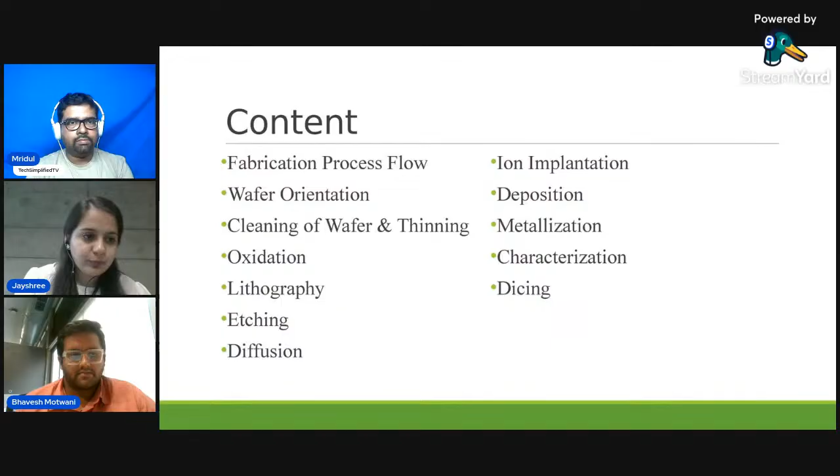So eventually, each of the devices has been stacked up with the help of different processes, individual steps, which we are going to cover in further slides. And then packaging is introduced, from dicing to die attach, then wire bonding, then after wire bonding, encapsulation to harden the device so that it is protected from the environment and doesn't get affected by the environment, stress and everything.

Then, once we are completely sure how the devices have been created, we go for testing, to check whether the whole completed device is good or not, and defect free. There are multiple reasons why we go for testing. And then the final step is the packaging. After packaging, the product is finished to get into the market.

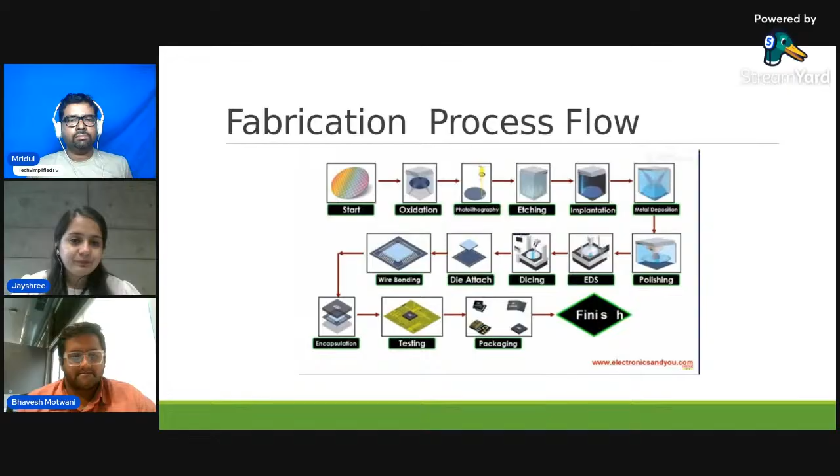So next is wafer orientation. I will hand it to Bhavesh. So generally, there are several different types of wafer orientation. 100 and 111 are the basic orientations that are in the market. They are mostly used. There is also 110. Then there are 200 and others.

Now, the reason for the names 100 and 111 is their crystallography. Crystallography plays a major role here, because someone from science would know that the arrangement of atoms is generally in a cubic structure: face centered, simple cubic, body centered. So there are different atomic structures, and that way the wafers are made.

And with the changing of the orientation, 111 is a mechanically very strong wafer. So 111 is generally used for MEMS devices and power electronics devices. 100 is used for better oxidation. If we want to make an IC, 100 can have a better oxidation. If we want to just do oxidation and make an IC, a MEMS device or an RF device, 110 is also a better option.

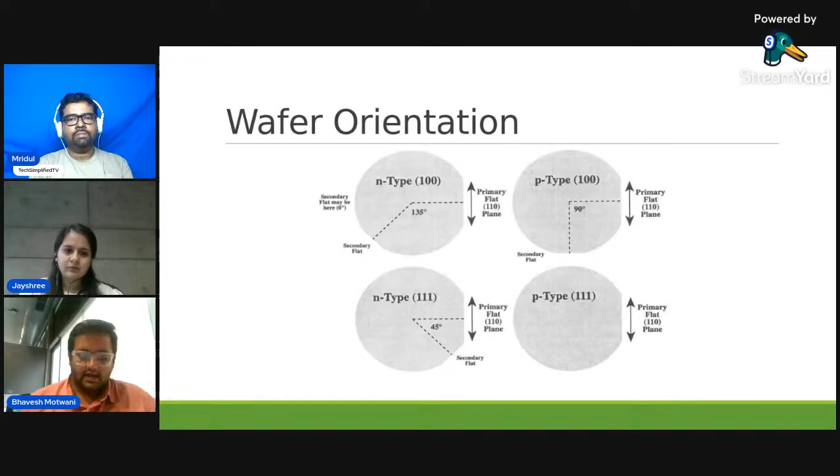So now we'll go through wafer cleaning and I'll hand it over to Jayshree. So basically, what is wafer cleaning and thinning? The term itself says how we are going to clean the wafer, and thinning means how the wafer size gets decreased. So firstly, we will go for the cleaning. There are multiple steps. Depending upon the industry, the requirements change.

So firstly, we will go for organic cleaning. What is organic cleaning? We are doing it for removal of residues like photoresist or oils, and contaminants from our body. Our body produces a lot of sodium. So how to remove it? So basically, we go for organic cleaning, then dry cleaning, and then inorganic cleaning.

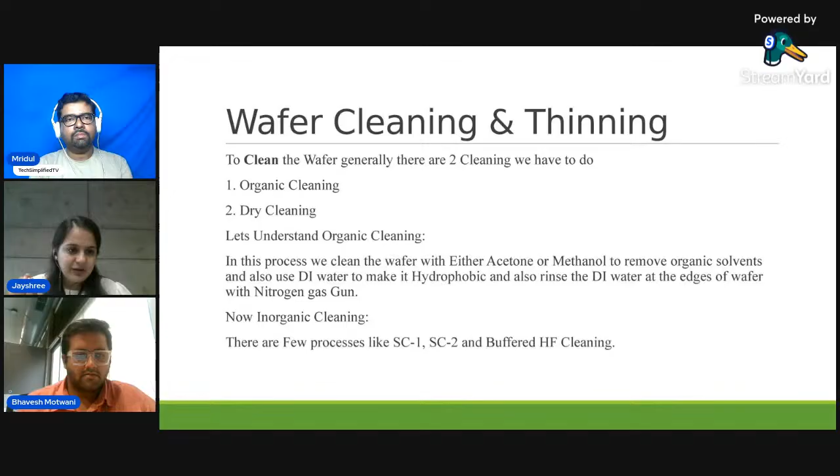The chemicals used for organic cleaning are acetone or methanol, to remove the solvents. In this image, consider the Si surface as a wafer, with multiple contaminants stuck over it. So how are we going to remove them? There are inorganic materials, organic materials, particles, and other contaminants spread over the wafer. So firstly, we go for the organic cleaning.

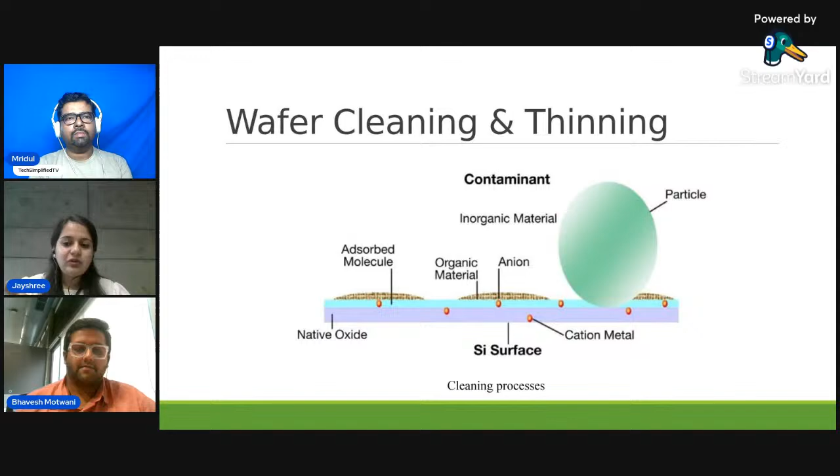Organic cleaning basically removes contaminants with the help of chemicals like acetone and methanol, and then with the DI water we are going to rinse off the wafer surface to make it hydrophobic. And then eventually in a later step we are going to use the N2 gun to blow off all the water spread over the wafer to make it hydrophobic basically.

And then inorganic cleaning. So basically what is inorganic cleaning? There are two cleanings, SC1 cleaning and SC2 cleaning. SC1 is basically ammonia and hydrogen peroxide with the DI water. So we are just going to remove the first layer with that, and then in SC2 we are going to use HCl, hydrochloric acid, and hydrogen peroxide. With that we are going to remove the second layer, and then the buffered HF.

So what is buffered HF? The purpose of buffered HF is to remove the native oxide layer from the wafer, to clean the wafer so that it's free of the oxide layer. And then H2SO4 and H2O2 is basically used as the piranha solution, and that is like 3 to 1.

So basically, that's the most important step, and no one should try it casually because it's a harmful chemical, sulfuric acid. So we have to make sure that we are only doing this process in the clean room. Other than this we are not going to do this. And while you're performing this chemical process, there should be someone nearby you, so that if, God forbid, something happens, there is someone to protect you or to communicate with each other.

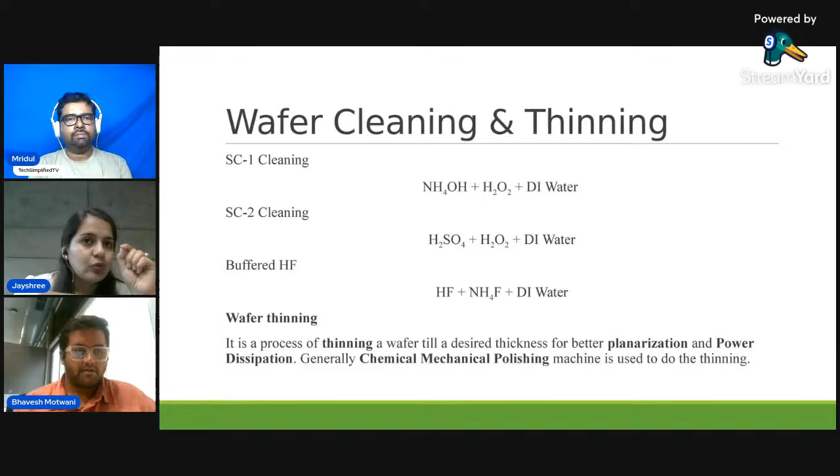So we will continue with the wafer thinning. Basically, what is wafer thinning and why are we going to do the wafer thinning process? Basically, for better planarization, power dissipation, and the last thing is to meet the thickness, I mean a constant height. Consider an example: if the company wants 2 mm, and with multiple layers the wafer gets to 3 mm, we are again going to do this thinning process.

We are going to remove the backside of the wafer, not the processed side. The backside of the wafer we are going to remove with the help of the chemical mechanical polishing process. As you can see, there is a slurry, because this process is going to heat up, and we are going to provide the slurry to make things cooler, and we are just going to remove the backside of the wafer.

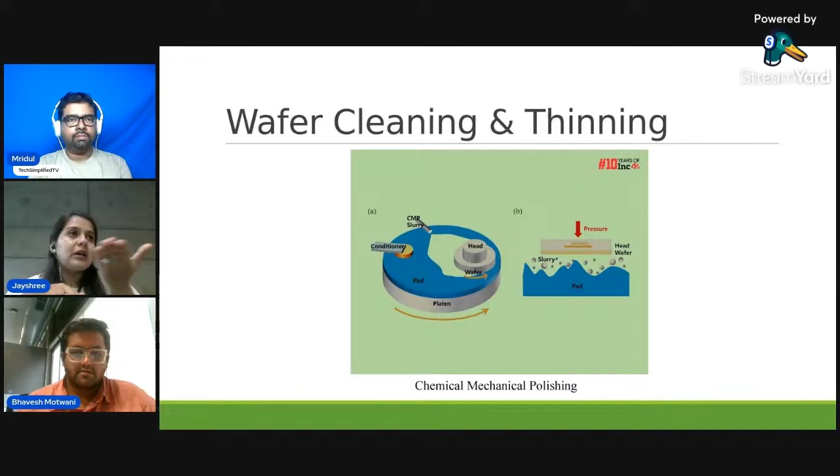Now I'll continue with the oxidation. Generally, oxidation is required for silicon wafers. We need an oxidation layer to act as an insulator. In my language, I would say it very roughly, as a rough idea: silicon is like a baby.

The reason I'm saying it is like a baby is because even if you breathe or exhale near the silicon, within a second it would take the contamination and become a contaminated wafer. So we need oxidation as an insulation and also as a passivation layer to protect it. It works as a gate dielectric for the MOSFET and different transistors if we want to fabricate them. As I said, the passivation layer.

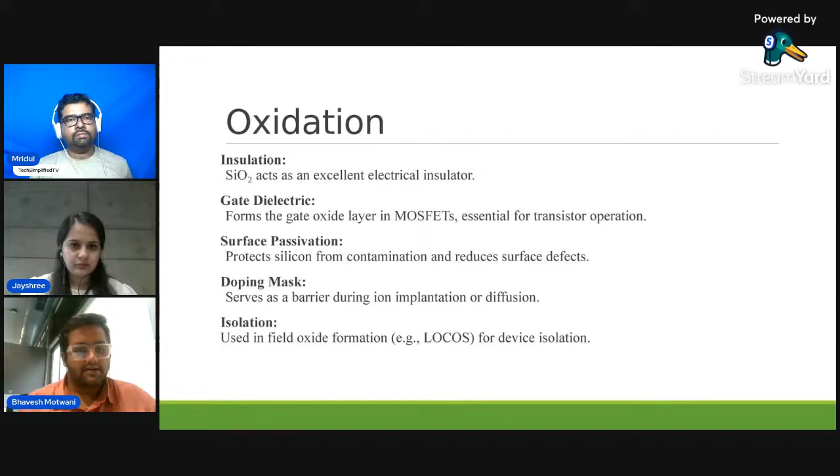We need proper doping, because doping is a part of the fabrication. It is also used as isolation for LOCOS. LOCOS is generally not used much now, but it is also a part of it in the industry. Now there are generally two types of oxidation: dry oxidation and wet oxidation. To give a general idea, dry oxidation is one of the purest forms of oxidation layer to be formed on silicon.

Its atoms are bonded like this. If we have bonding like this, there could be no point defects. There is generally no space like a grain boundary left, so no sort of contamination would happen in dry oxidation.

Whereas wet oxidation is very porous. During wet oxidation, the bonds are generally like this, so you can see the space between my hands. Within that space, a different molecule or atom might come in and make an interstitial defect, and may cause a problem in the SiO2 layer.

So generally, if we want to do an oxidation during research, we would do just a dry oxidation. But if we want to run an industry, generally in the industry they will first do the dry oxidation, then they will do wet oxidation, and again they will do dry oxidation, because it will cover the layer and make a proper formation for the porous layer, since, as I said, wet oxidation gives a porous layer.

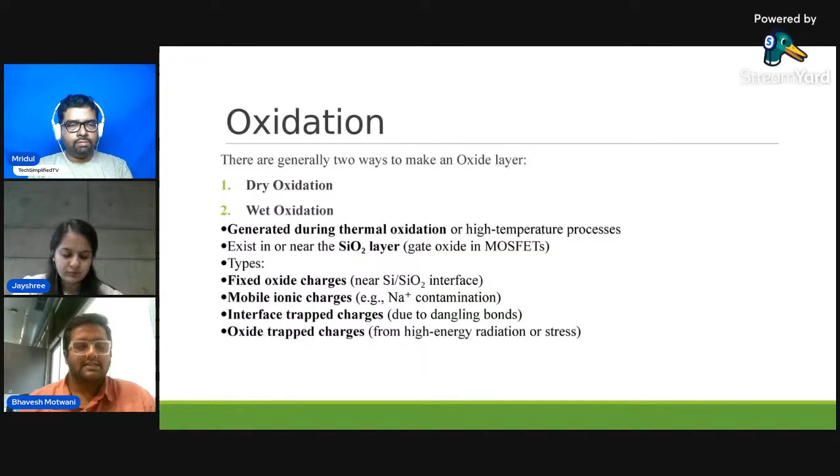Basically, for doing an oxidation, we need to go up to 1200 degrees Celsius. There is a thermal furnace, a proper furnace, for that. During thermal oxidation there are a few charges that come in, fixed oxide charges and mobile ionic charges. These charges form a contamination if we don't do the oxidation properly, so they can cause problems for IC fabrication.

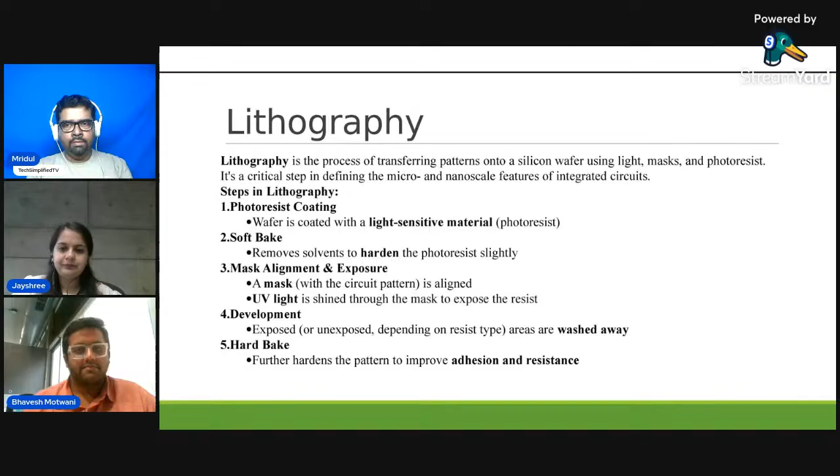As I said, there are two types of photoresist: negative resist and positive resist. Generally the mask is made up of chromium material, though some companies also use stainless steel, but it depends.

Now the importance: as I said, the mask determines the feature size, because I have to make different lithography layers repeatedly. For those working in the VLSI domain, while using Cadence Virtuoso or similar tools, joining those lines to complete DRC and LVS, DRC uses metal layers and polysilicon layers.

So we have to do different types of multiple metal layers, and for that we have to use lithography. We have to continuously perform lithography with multiple layers to make a proper IC. If we have to fabricate an IC, we have to do lithography multiple times. We've heard of advanced nodes like 2 nanometer, 3 nanometer, 4 nanometer - this is all because of lithography. We cannot go through advanced nodes without lithography.

Everyone knows ASML. If there were no ASML in India or in the world, I would surely say the semiconductor industry wouldn't be this much possible till now.

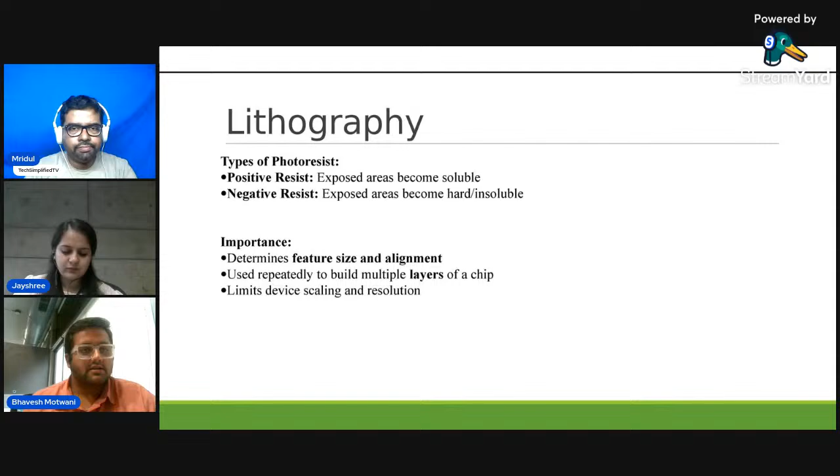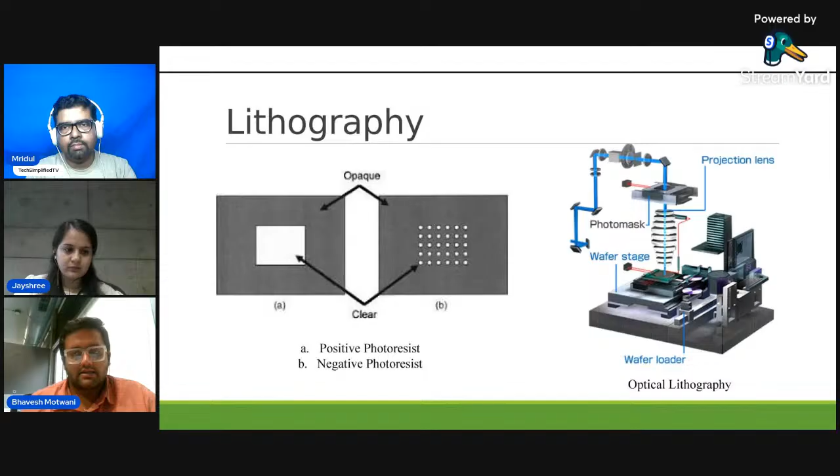As I explained, there's positive photoresist and negative photoresist, and there's also optical lithography. Optical lithography uses optical lenses to form some sort of pattern on the wafer. Now we'll come to this, which is also a proper process.

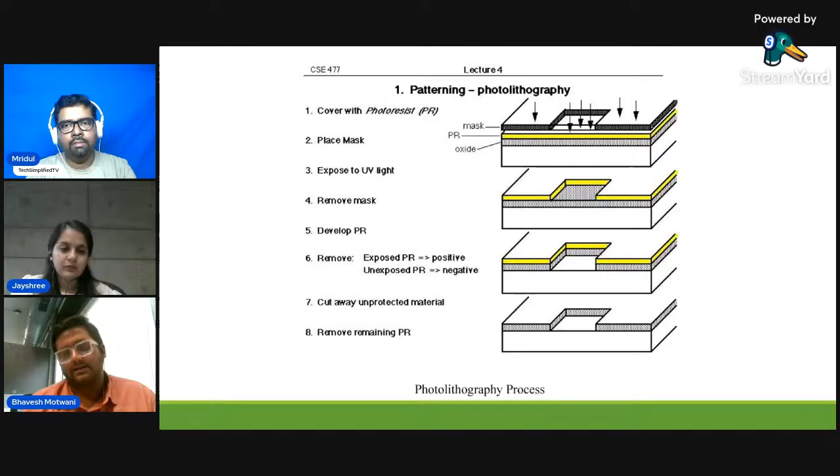We have to cover with photoresist, place a mask, expose it to UV light with the optical lithography machine, then run it through the developer machine. Then we expose with the positive or unexposed with the negative mask resist, then cut away the unprotected material, and what remains is a proper layer - whether metal or polysilicon, whichever we want.

Now we'll come to the etching. I'll hand it over to Jayshree.

So, as we got to know what lithography is - in lithography we are creating steps over the wafer to create a structure. So what is etching doing? The term itself means to remove the selected materials. To create the patterns, there are two types of etching process: wet etching and dry etching. Depending on the condition required, we choose one.

Basically, the reason we perform the etching process is to create connections. In simple terms, if we are going to connect power into different connections, like from the bottom layer to the upper layer, everything gets interconnected. We are basically creating gates and vias in the interconnects, and moreover.

So the flow is: firstly we remove the pattern defined by the photoresist, which has been developed over the lithography step. Then the etchant removes the exposed materials, while the remaining photoresist protects the unexposed area.

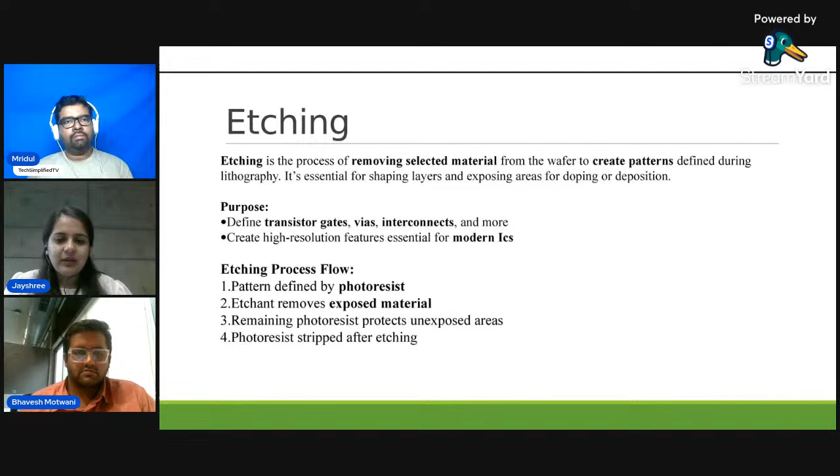And then later the photoresist strips off as it's being etched out of the wafer. So this is the whole etching process. Now I will go with what is wet etching and dry etching. There are two etching processes.

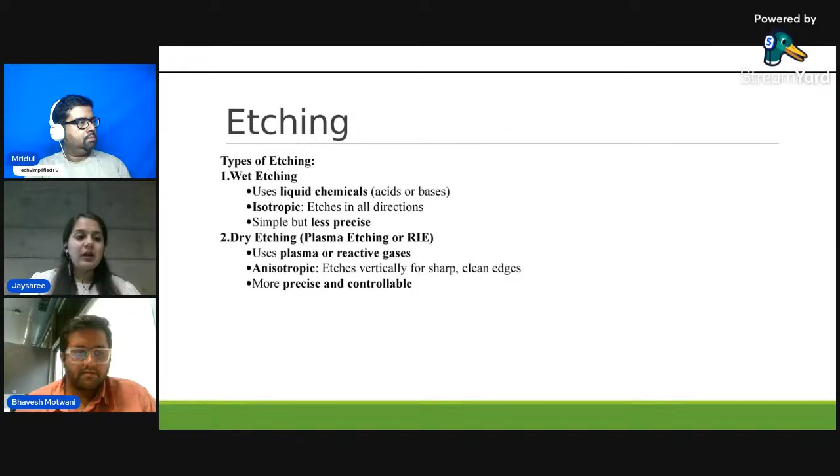This is done with different types of processes, like RIE (reactive ion etching), ion beam etching, deep RIE. Wet etching is also done with multiple steps.

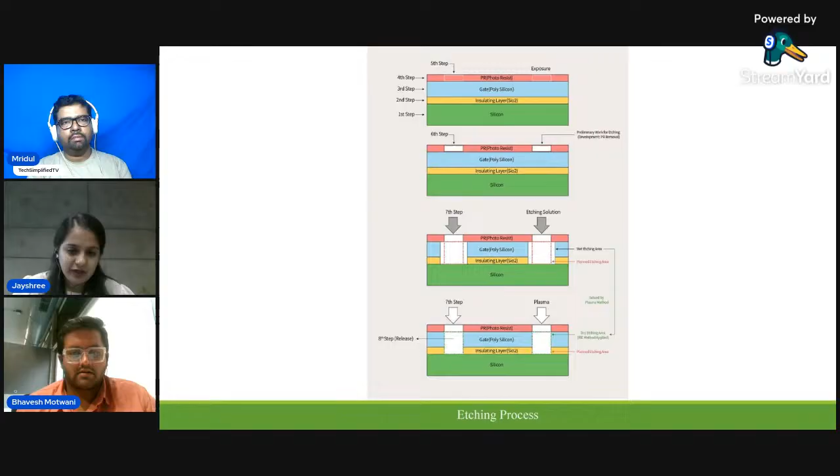We basically choose based on the selectivity to the mediums, from high to low, depending on the requirement and other multiple parameters.

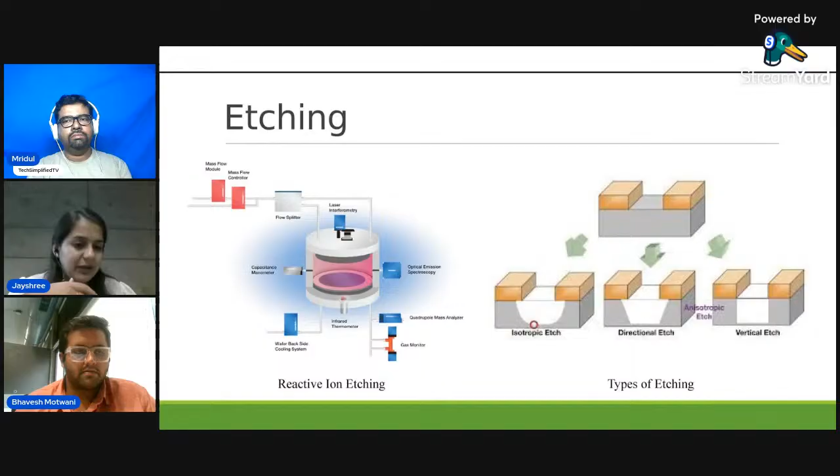Now I'll continue with diffusion, explaining it in a very basic way. Diffusion is putting something in an area, and it spreads out - that's the basic phenomenon. Diffusion is the process of introducing dopant atoms into the silicon wafer by thermal activation. We need thermal activation because with the annealing part, it becomes much easier to do the diffusion.

In the process flow, we have some sort of solid, gas, or liquid that gets diffused inside based on how we need it. As I showed with the oxidation furnace or thermal furnace in the oxidation part, we can use the same furnace if we want - we just need to change the bubbler. In the bubbler we add the material we want. The material can be n-type or p-type depending on our requirement - these can be boron, phosphorus, arsenic, bismuth, based on what we need to do.

Now high temperature annealing - after diffusion, let me explain. First we diffuse it, and if we diffuse the atoms, we need to spread them and make it work. To diffuse it, we diffuse those atoms in the drain and source, forming a proper tub-like shape, and those atoms would be set there in n-type or p-type, and we spread it out with annealing.

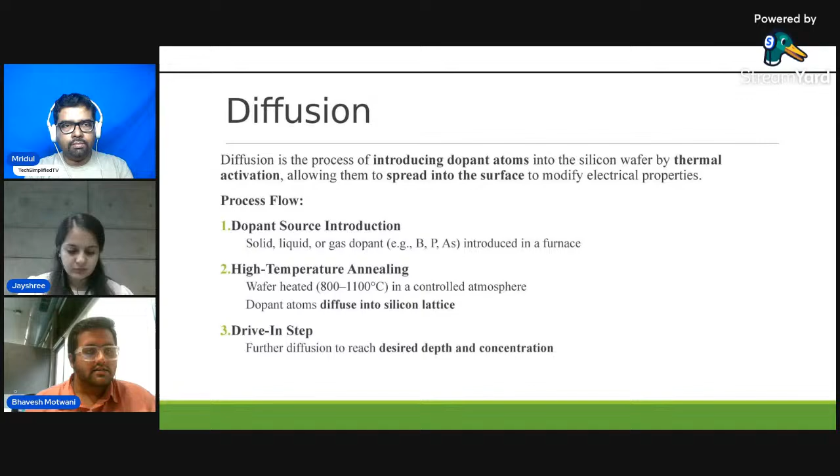If source has more and drain has less dopant, there could be a difference in VTH. So depending on the concentration, VTH can also change.

Now diffusion: as I said, for P type and N type, we need to dope the source, drain and base regions. Key parameters are time and temperature. More the temperature, more the diffusion; more the time, more the diffusion depth.

For diffusion we need to understand Fick's laws. There are two Fick's laws, one for the diffusion of the atoms and the second for the spreading out of the diffused atoms. There is also a continuity law, which is almost the same for how the atoms diffuse. We'll surely make a next webinar to understand Fick's laws in a deep manner.

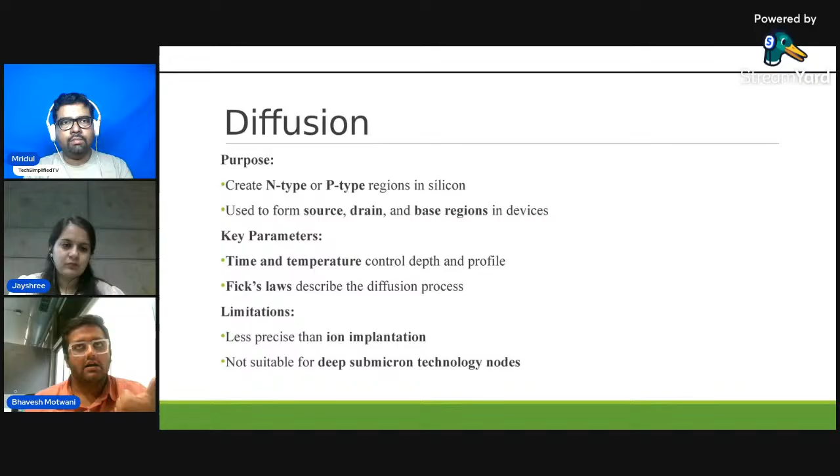Now if we have diffusion, there is also a similar part, ion implantation. We can diffuse atoms in two ways: diffusion and ion implantation. Ion implantation is almost similar to this, but it is more precise. It is used in more deep submicron technology, and it is very precise with more control than diffusion.

And then ion implantation. As I said, diffusion and ion implantation are similar for doping, almost similar, but they have a different technique of doping. Now, ion implantation, we need ion sources.

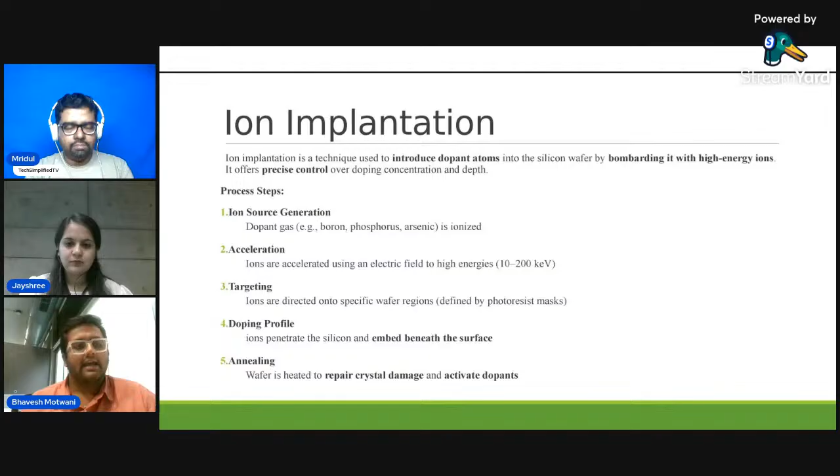As I said, it is expensive and can damage the wafer, but it is better for submicrons, and it is a guaranteed better technology than diffusion, very controlled if used precisely. Same as diffusion, we need to do it on source, drain, and base layer. So ion implantation has some issues, but it is very amazing, very beneficial for use.

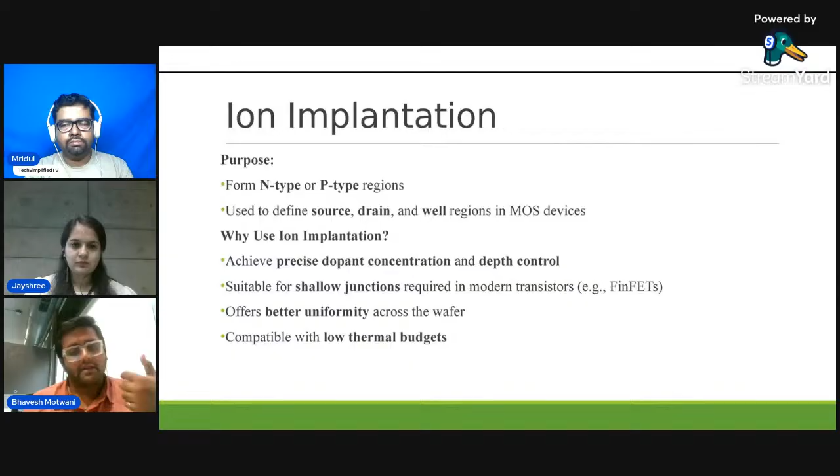As I said, it achieves precise dopant concentration, we can have precise depth control and proper control over it. It makes trenches like junctions, offers better uniformity, and is compatible with lower thermal budget.

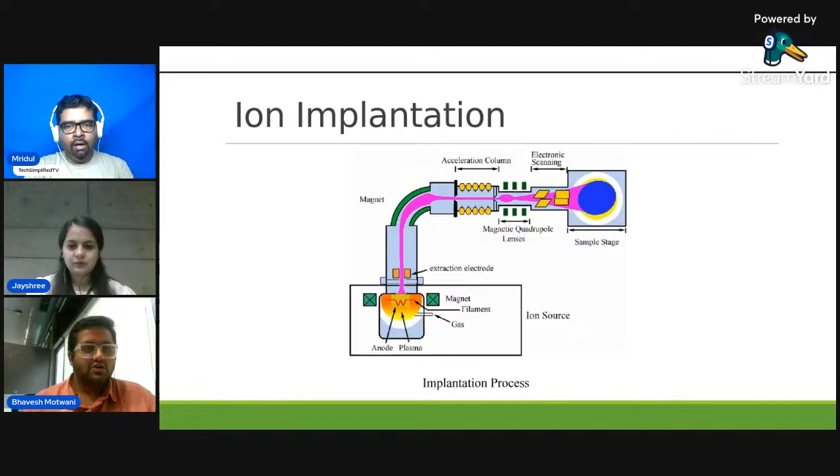It would make a trench and depth, and then we would anneal it at 800 to 1100 degrees Celsius to make proper doping inside it. And then we come to deposition. Now deposition will be explained by Jayshree.

So basically, what is deposition? Deposition is like depositing something. Depending upon what is depositing, we are creating devices, multiple devices adding upon the layers. Basically, deposition is a process of adding multiple layers, thinning the layers of metals, insulators, semiconductors, depending upon the wafer of silicon and requirements. So, what is deposition? There are two types of deposition.

In fabrication, we use aluminum for interconnects, copper for damascene process, and titanium tungsten for barrier layers. Different types of depositions have been made, and basically what are the key factors, what we are supposed to keep in mind while depositing metals, insulators or semiconductors, like film uniformity.

Like if this is the wafer, only certain materials are being deposited here and the rest is not being deposited, and it's idle. So yes, this wafer wouldn't be used further. We are supposed to make sure that the whole wafer is being deposited and exposed over the deposition layer.

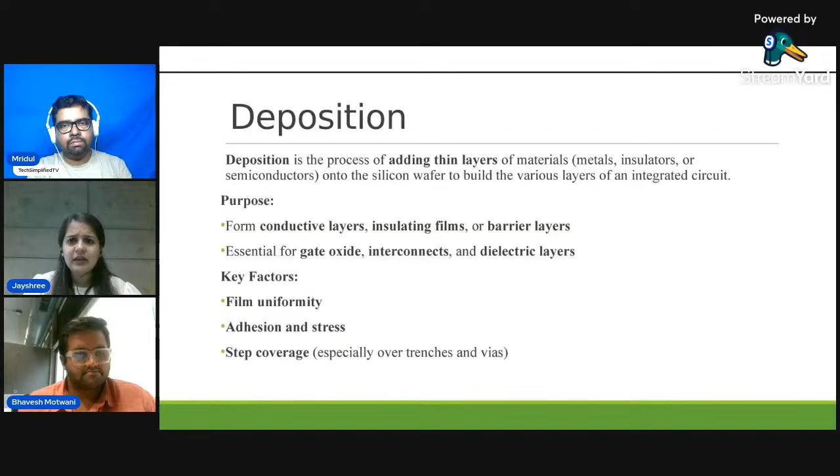Then the adhesion and the stress, how much we are giving in the adhesion process. Adhesion, in simple terms, we can see it as like gum. Okay, we are going to stick it. In that way we can understand adhesion. And the stress is the amount of pressure it is going to sustain, environmental stress, multiple parameters. And for this, there are three techniques which are used in deposition: PVD, CVD, and ALD.

Basically, what is PVD? It's physical vapor deposition. Physically, we are going to deposit, and we are not going to change the chemical components. Materials are being evaporated, either sputtered or due to thermal gases, and then deposited on the surface. Now, consider a substrate and the target. Sorry, the target is like what we are going to deposit, and the substrate is what we are going to deposit on. Think in that way.

In this image, you can see this image is basically of sputtering. There are two types of PVD techniques: sputtering, and the other is thermal evaporation. Firstly, we will go for sputtering. In this image you can see there is argon gas, then we are providing a current. So what is sputtering? We are going to heat up, provide the argon gas, and after giving the current, this argon gas is going to react with the substrate. That will create a blue light structure, which will be plasma.

And plasma is multiple numbers of ions. There are a number of ions over there, bombarding, and the plasma is actually generated in the vacuum itself. Then only the desired materials or ions which are supposed to be deposited get to the substrate, and the substrate is being rotated. There are two sputtering techniques: RF sputtering and DC sputtering. Both have their own advantages over each other. RF is radio frequency current, and DC is obviously direct current.

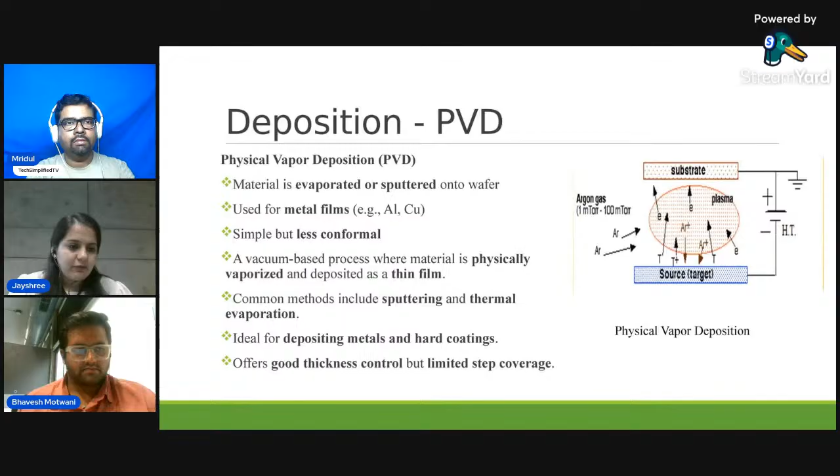There are several types of CVDs. Like, there are more than 15 or 20 types of CVDs. I can't name all of them, but LPCVD, PECVD, MOCVD, ICP CVD, there are thermal CVDs, there are ceramic CVDs. So there are several CVDs with different applications. Generally, industry uses LPCVD, PECVD, and MOCVD in most of the cases. Other than that, if there are highly advanced applications, they use different CVDs.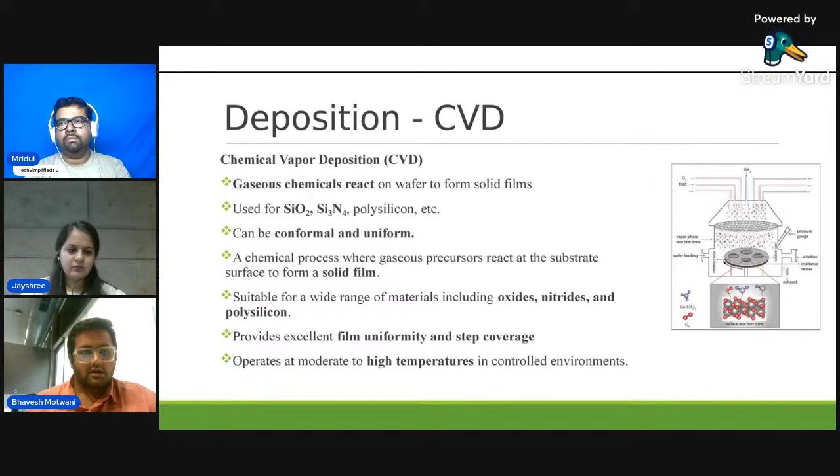We can work on micro LEDs, many things. There are different devices we can make. Even Jayshree has made a memristor on PVD. I have worked on LPCVD to make a passivation layer of nitride on silicon for solar cells. So there are different uses of deposition, and then there comes ALD, atomic layer deposition. This is a very advanced topic of deposition. It has many uses.

We can make 3D structures, high dielectric materials, oxides, advanced nodes. We can work on advanced nodes. Possibly we can make every sort of structure we want: quantum, thermoelectric, optical, LEDs, lasers, VCSELs, and whatever materials we need, we can fabricate, making a thin deposited layer. It is basically deposited one atomic layer at a time, like small atoms. If you see in the figure, atoms are generated and then deposited, making small pieces out of it.

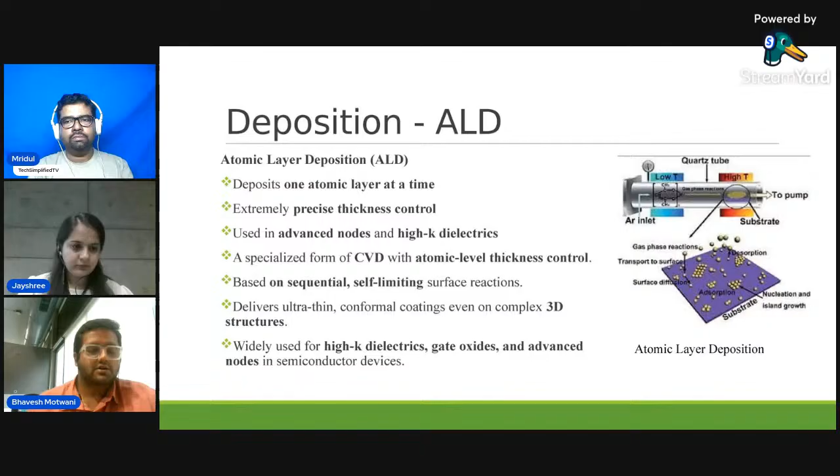And it has precise thickness control. It must have in situ monitoring or real-time control monitoring, which is very beneficial to control the thickness of the material which is to be deposited on the target. There is only one sort, one ALD only. There are no subtypes of it, but it can work in different ways for thin films, and it is one of the advanced deposition machines. And metallization.

So metallization is probably the last process of fabrication. Metallization is used to make contacts, vias, and trenches on the IC. If we have done all the processes, like we have made a source, we have made a drain, now if we want to characterize it, check it, what do we have to do? We have to make some contacts. We have to have some metal layers so that if we give a voltage or a current to it, we get data from it. So we need to make contacts to drain and source. That's why we do metallization.

It is a process of depositing metal layers. Again, it says depositing. So deposition like PVD and CVD is used to deposit these metal layers to create electrical connections between different components in an IC: transistor, resistor, capacitor. Now there is a small concept in it: the Damascene process. Anyone who has deposited copper in a transistor has to go through a Damascene process. The reason is, when we deposit copper in the source or drain, it generally melts and deposits very deep, and it can tunnel through the device or destroy the device. So we have to make it from scratch.

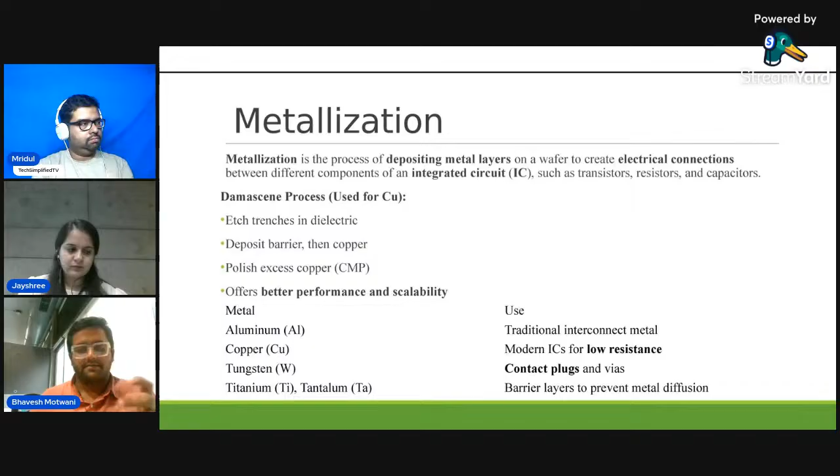So there are different purposes: form interconnects between devices, make power, ground and I/O pads, multiple layering wires. Now metal deposition, like via PVD or CVD, can happen. Patterning by photolithography plus etching defines wire shaping. So different barrier and adhesion also has to be done.

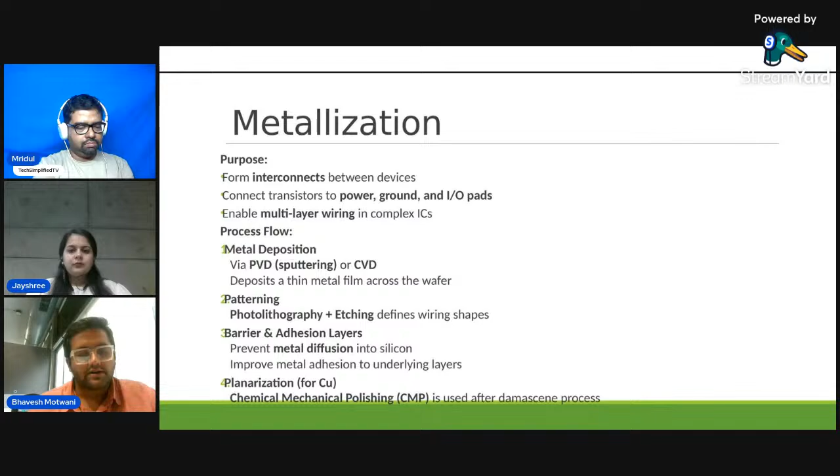Like I said, after making barriers to deposit copper, we also have to planarize it, otherwise there would be no uniformity to it. So we also have to do chemical mechanical polishing. So generally, to do the metallization, we have to go through the PVD process.

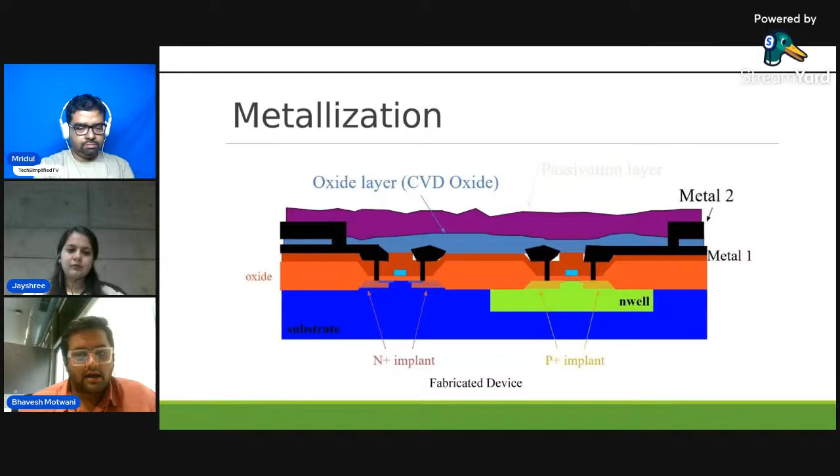And if you see in this figure, this is how a fabrication has to be done. After fabrication, this is the source on the left, and on the right, this is the drain. And after making metal contacts, there is this oxide layer of CVD oxide to make a passivation, another oxide layer as a barrier, and another layer to passivate against different types of materials coming through as contamination.

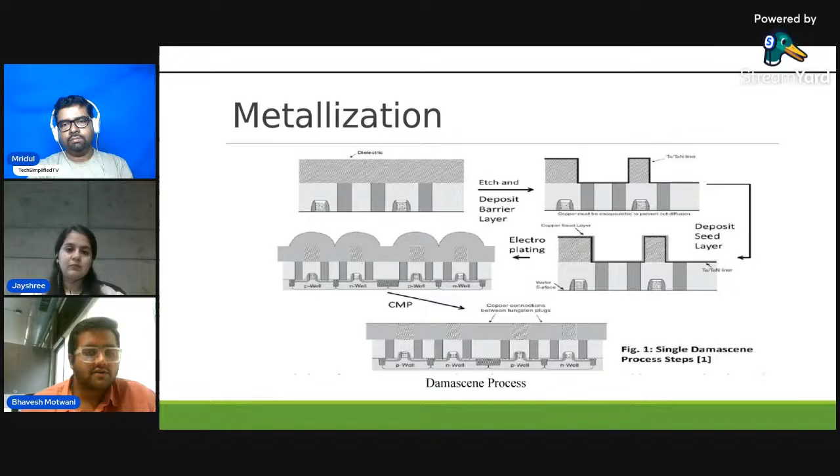So in this process, I have explained the damascene process. As I said, we have to make barriers, then we have to deposit, as a deposition barrier. Now electroplating. So these are some of the ideas of how to do the metallization for different materials. Now characterization, Jayshree will explain it.

So basically, what is characterization? Characterization, in the semiconductor domain, means we check that the device we have created is actually defect free, and measure and analyze its physical, chemical, electrical and structural properties. The reason we do it is to check the material quality, thickness, layers, and the doping level.

If any side of the wafer is getting defective during the process, how would we get to know? That is with the help of characterization. Then to check the contaminations present and the process deviations, and eventually check the electrical behavior, its threshold voltage. Then if there is some leakage current present, to check the leakage.

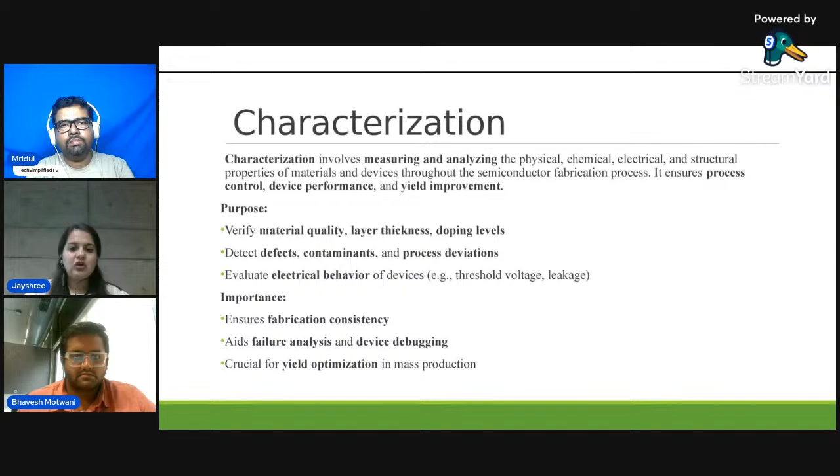This is the most important step after fabricating a device, because before getting into the market, a device must be checked, and that is done with the help of characterization itself. So there are multiple ways to do characterization. Firstly, we will go with physical and structural characterization, as this image has many terms which might not be easy to understand.

So firstly we will go with ellipsometry. The tool used is optical ellipsometry. Why do we use it? To measure the film thickness and the refractive index of the wafer which has been fabricated. Then SEM and TEM. What are SEM and TEM? Basically, scanning electron microscope and transmission electron microscope.

So why do we do this? Even the tools themselves are named SEM and TEM. The reason is to get a higher resolution image and the cross section of the fabricated device, to get the actual image, the connections, the crystallography and orientations of the wafer, everything captured by SEM at the surface. And then TEM. TEM is basically checking the atomic level internal structures.

Then AFM. What is AFM? Atomic force microscopy; the device is also known as AFM. We use it to check the surface roughness and topography. The amount of roughness created while depositing the layers needs to be checked, and if required, we again go with the cleaning then polishing process, again and again until the roughness is removed. Then XRD and XPS.

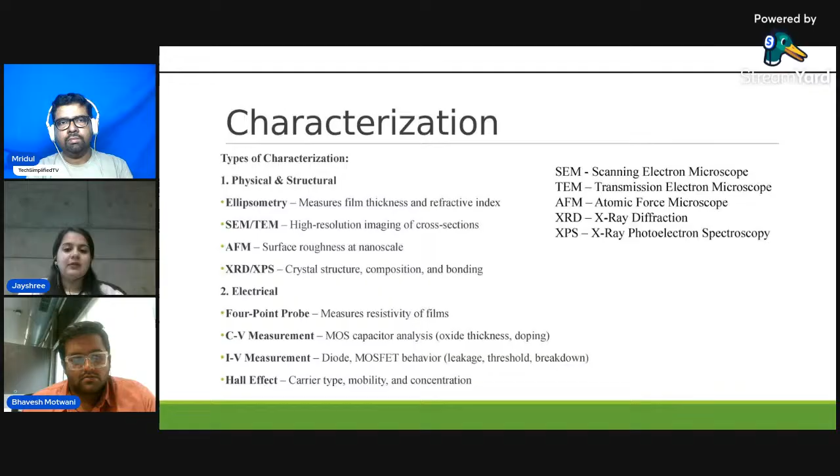Then chemical composition. It is characterized with the help of SIMS, FTIR, Auger electrons, and EDX. What is SIMS? It is secondary ion mass spectrometry. The purpose is to check the dopant profiles and the depth. What is FTIR? It's Fourier transform infrared spectroscopy. It defines the bond types in the film, what bond structures are created after the deposition of the layers, and before. Both are checked with FTIR.

Then Auger electrons, for surface and elemental analysis. It is attached with the SEM, the scanning electron microscope, as we got to know. With Auger electrons we receive the data about the structured wafer.

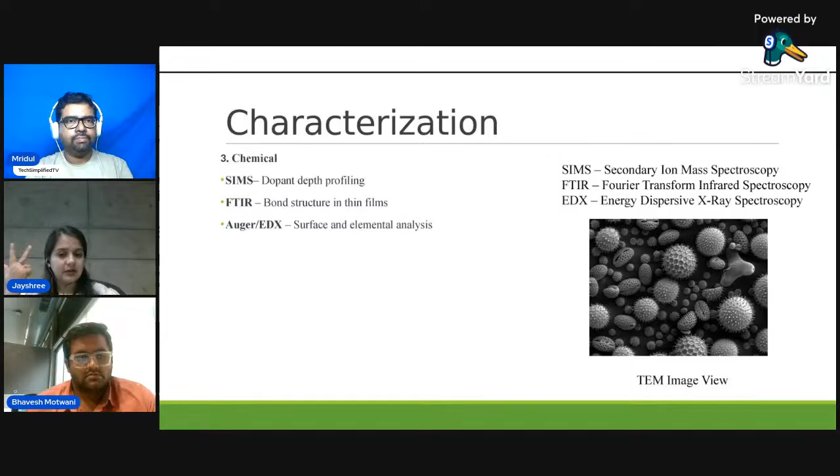And why characterization is critical: it confirms whether each step is done successfully or not, helps to debug failures, and helps meet the required parameters, like the desired thickness. So characterization is done after each individual process: after oxidation, etching, implantation, deposition. Almost every time we do this characterization, and eventually before the final packaging.

Then we go to dicing. What is dicing? The term itself is like dice, cutting of the wafers into dies or chips, whatever terms are used in the market. We use dicing either before or after packaging. There are multiple requirements according to which we do the dicing. So what is the dicing process?

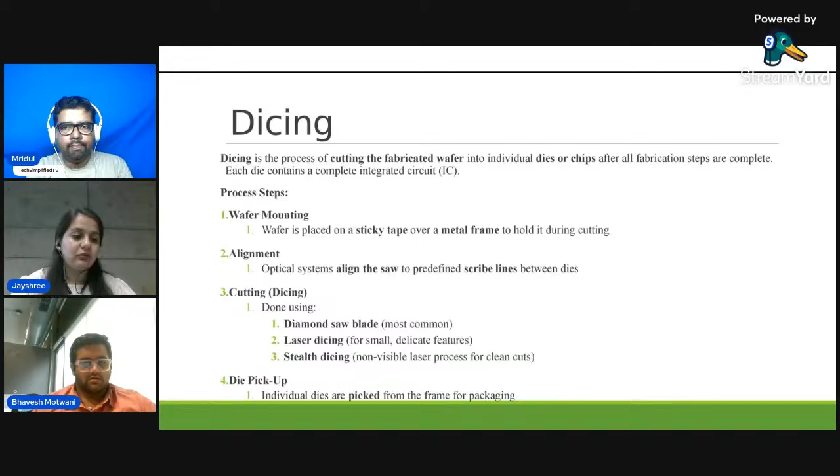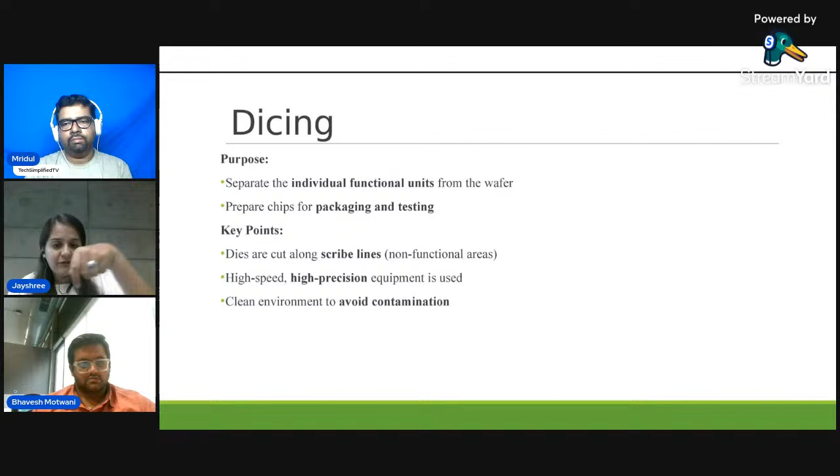Then the cutting, dicing, with types like diamond cutter, laser cutter, stealth dicing, which I will show in the next slide. Then we pick the die with a vacuum, automated handler, picking individual dies from the tape, and these dies are ready for final testing and packaging. So there are different ways to cut a wafer. Basically, blade dicing.

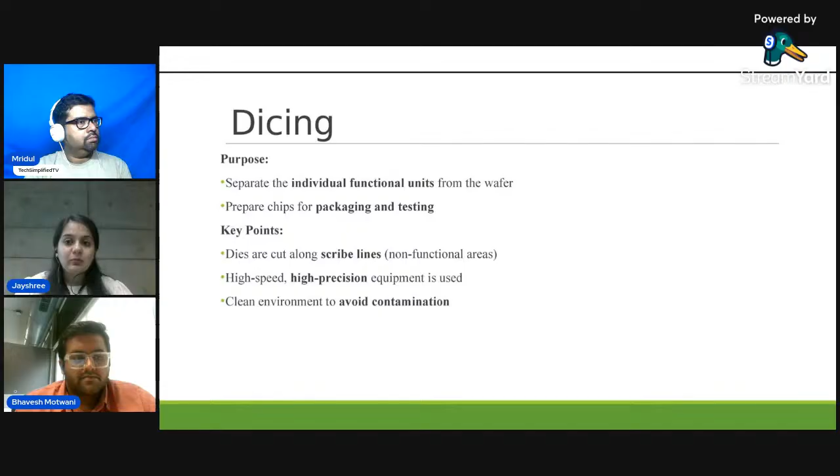Blade dicing, then stealth dicing, and the reason why we are going to do the dicing. Basically there are blade dicing, laser dicing, plasma dicing, mechanical sawing, stealth dicing, and scribing. The most widely used is blade dicing. Blade dicing is basically done in industry; as you can see in this image, this is the blade diagram. There is the wafer itself, and we are going to remove its individual dies. It's being cut with the help of the blades.

Then laser dicing. So what is basically laser? We can say it's a laser light, and it works on the markings. Make sure that the markings are clearly visible, because if the markings are not clearly visible, then we are not able to do the dicing properly. Either we are going to cut the device which we have created, or multiple things can happen. So yes, markings are much more required. They are created while creating the mask. We provide a laser, and with the help of that, we are able to dice the individual dies.

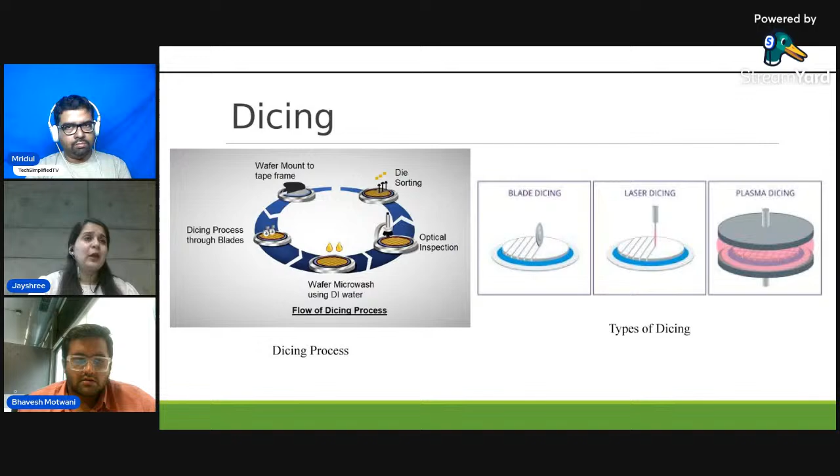And then plasma, what is plasma? As you can see in this third image, there is a plasma generated. So what is plasma doing? Plasma dicing is actually a research topic, not yet used in industry. It's still in research. No one is using it basically, but we focus the plasma onto certain linings and markings, and then we cut it.

Then what is scribing and breaking? During our childhood, we would make a marking on a paper with our nails and then tear the page off. Exactly the same is scribing and breaking: we scribe and then remove by breaking it. Then stealth dicing is again a laser-based technique, working within the wafer, which is able to remove the split area.

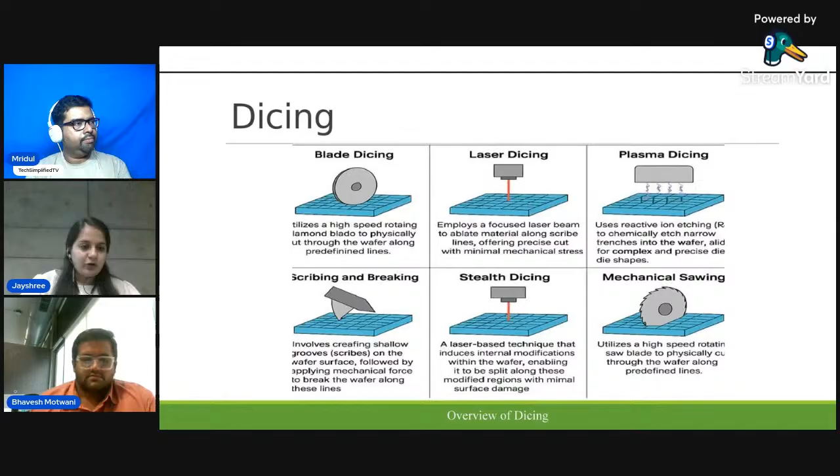And mechanical sawing, as the word itself says, is mechanically cutting. This is just an example shown in the image. There are mechanical cutters, if the wafer is too small and we are not able to use this whole process. I am not sure about it, but there are mechanical instruments where we scribe and cut the wafers into dies. This was about the dicing, and I think we are done with the presentation.